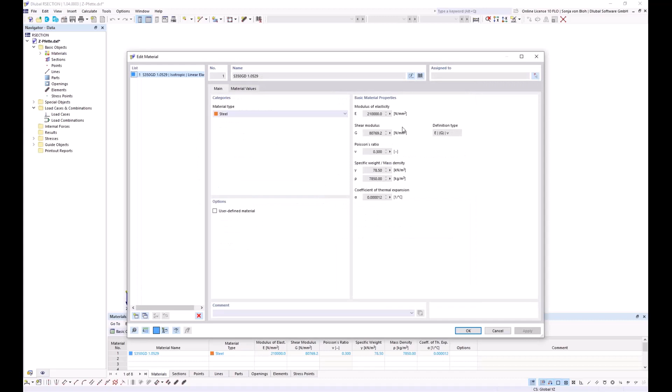Furthermore, I have to define the material here. I just want to use this material that's already shown, but if I want a different material, it would be possible to open the material library and select it from there. Okay, click here on Cancel.

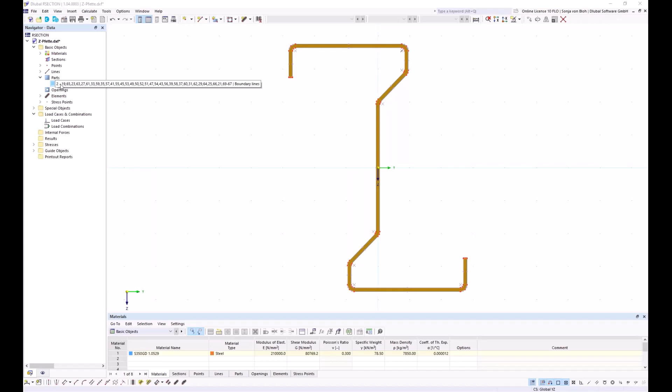Then I start the import process and click OK. With this import function, the part is created automatically, and the elements are also created automatically, as you can see here. These elements are required for the calculation using the thin-walled analysis and for the calculation of the effective cross-section.

I now go into the base data and choose the analysis method. Two analysis methods are available: the finite element analysis and the thin-walled analysis. I choose the thin-walled analysis here. As already mentioned, elements must be defined for this. This setting only affects the default setting in RSTAB; if necessary, I can change the analysis method there.

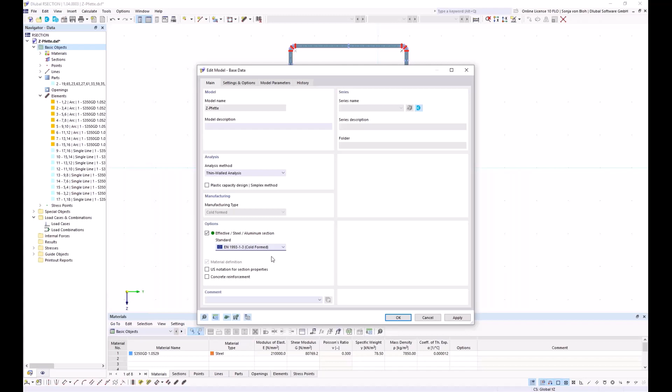Furthermore, I activate the add-on Effective Steel Section and choose the standard Eurocode 3 Part 1.3 for cold-formed cross-sections. This setting is necessary so that the steel design in RSTAB is carried out according to the standard for cold-formed cross-sections. Then I click OK.

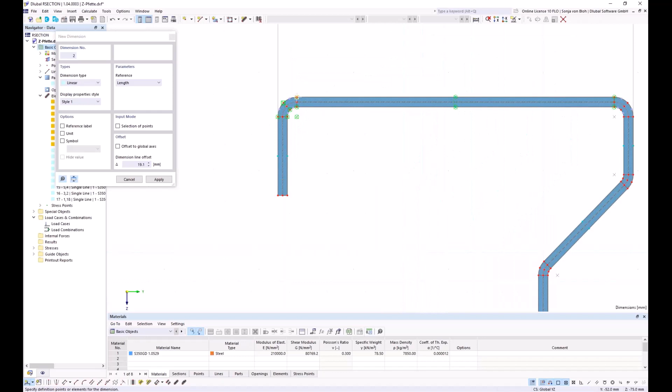It's also possible to dimension the cross-section. I will do this by creating a new dimension and choosing the corresponding points. These dimensions can also be displayed in RSTAB.

In RSECTION, I can also calculate the effective cross-section and the stresses. This is useful, for example, for a preliminary design. This has been demonstrated in previous webinars, so I won't go into it today.

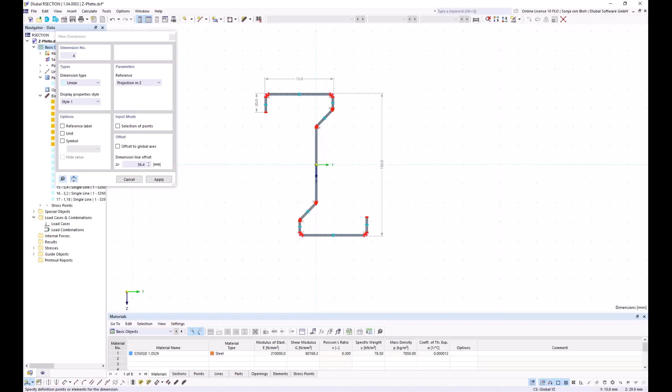However, it makes sense to start the calculation once to find any modeling errors. I go to Calculate All, and no error was shown, so it's possible to import this cross-section into RSTAB. Then I save this file, click Save, and save it in this directory, and then I can switch to RSTAB.

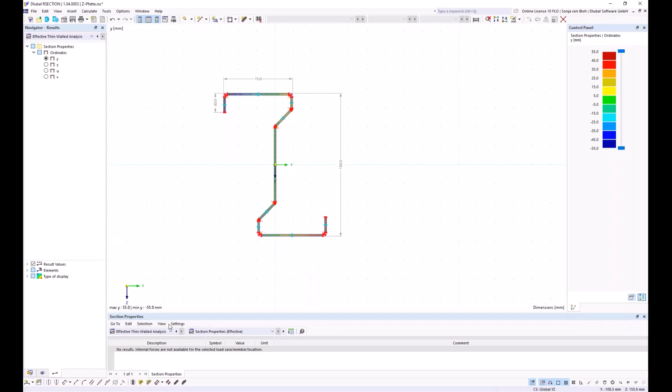I have already created the steel hall in RSTAB. The purlins consist of the cross-section just created in RSECTION. For now, I have assigned this cross-section to them, and I want to modify it.

For this, I open the Edit Section dialog, and then I open my cross-section library, and then I want to import my created cross-section in RSection.

The folder in which the RSection cross-section is stored must be integrated into the Dlubal Center. It's only possible via the Dlubal Center to import a cross-section from RSection. I want to put this folder directly under the project, so I check...

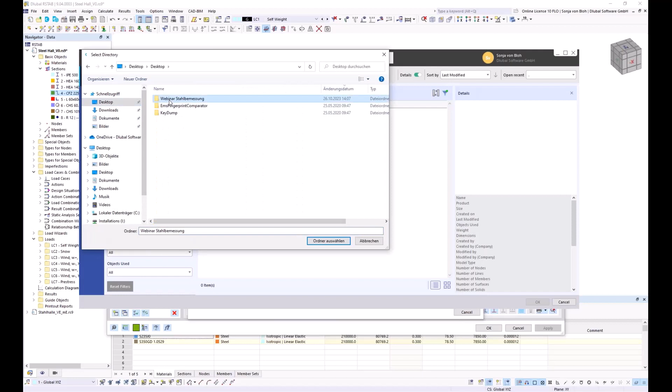I choose Add Existing Project here from the context menu, and then I choose my folder. It's here on the desktop, and then I click on OK.

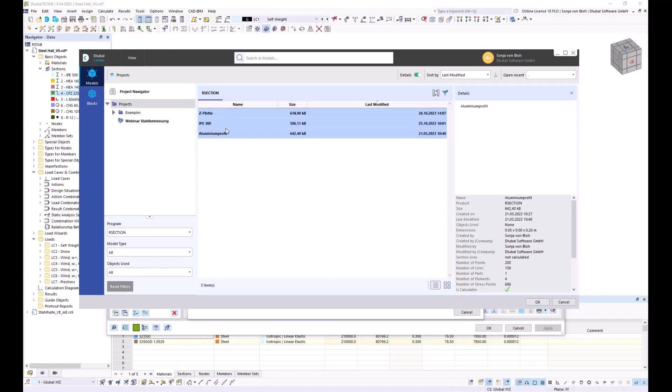The folder is now linked to the Dlubal Center, and I can select the RSection cross-section. It has recently become possible to import multiple cross-sections in one step. For this, I select these cross-sections, and then I can click on OK, and all the selected cross-sections will be imported into Rstab. Now I only want to import this cross-section, so I click on OK.

Here the checkbox thin-walled model is activated. This setting was taken from the chosen analysis method in RSection. However, I can also deactivate this option so that the calculation of the gross cross-section properties is carried out using the finite element analysis.

If this option cannot be selected, then no elements are defined in the RSection cross-section. You can see in the graphic of the cross-section that the dimensions are shown. These are the dimensions I created in RSection. And I click here on OK.

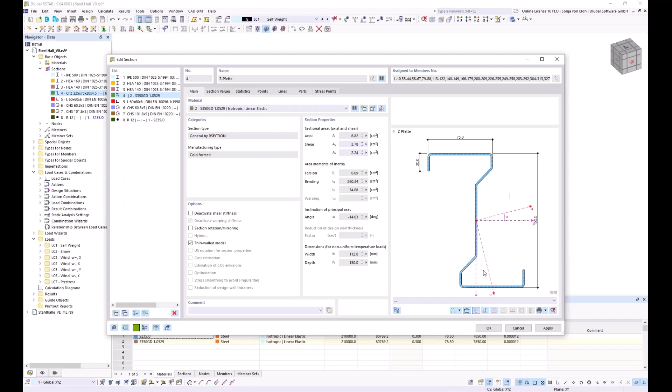For cold formed Z cross-sections, the center of shear lies outside the cross-section and the main axes are rotated. Usually the loads don't act on the shear center, which results in double bending and torsion. Usual lateral torsional buckling checks cannot be carried out.

Eurocode 3 Part 1.3 includes design methods for cold formed Z purlins, but the purlins must be within certain limits. These simplified design methods are not implemented in steel design. The lateral torsional buckling of any purlin can be carried out according to second order theory, considering warping torsion and the use of equivalent imperfections.

I would like to show this approach today, and for the calculation considering warping torsion, I first activate the add-on warping torsion in the base data. For this, I go to the base data, on top add-ons, and then I activate this checkbox here.

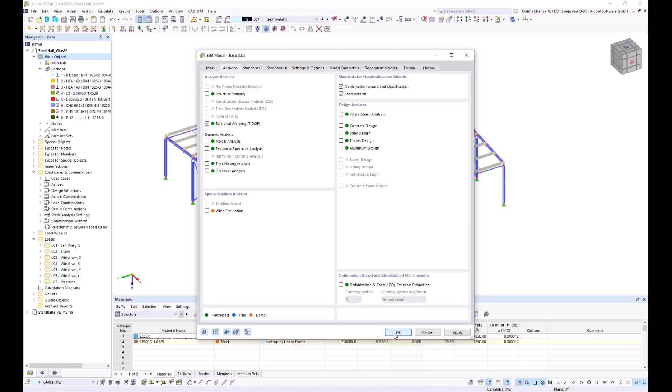Warping at the member ends is assumed to be unhindered by default. To transfer the warping between members that are connected, you can define a set of members.

The frames consist of several members. You can see it here. These members are divided, and this means that there are warping releases between each member.

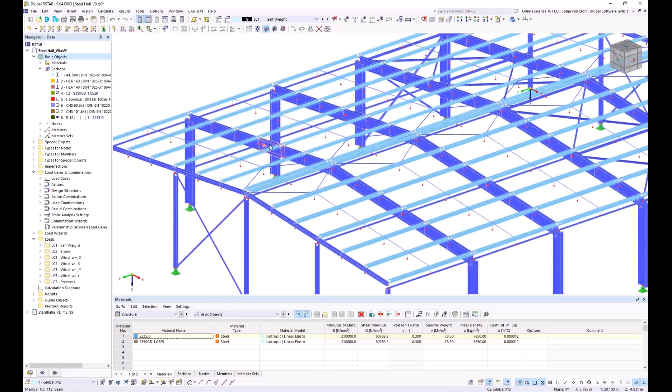The warping should be continuous for the frames, so I've already defined a set of members for them.

I show you this in the wireframe model. Here I've created the set of members for each frame, and if I open the Edit Set of Members dialog, then you can see a checkbox discontinuous torsional warping.

This option controls whether the warping should be transferred or not. This is supposed to be transferred, so I don't check this checkbox.

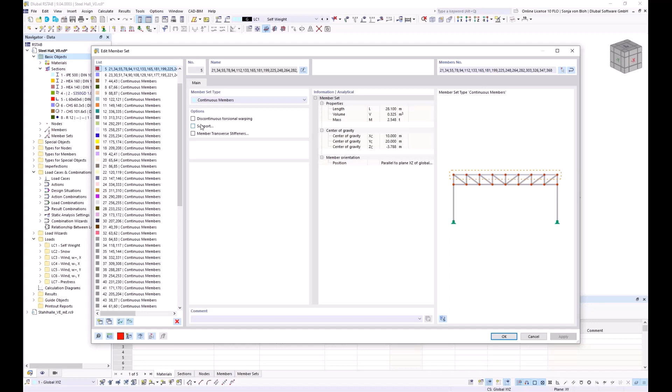Furthermore, the purlins are divided at the connection point here with the purlin suspensions, and the warping should be continuous for the purlins. So I've defined a set of members for the purlins too. You can see it here.

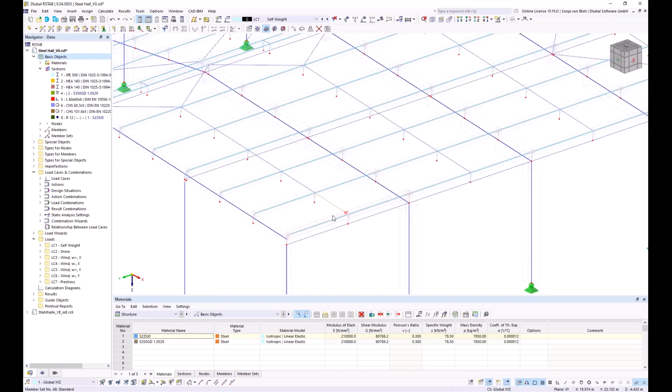When calculating with 7 degrees of freedom, the connection of members is always assumed to be at the center of gravity. If the connection is to be made at a different point, you can use member eccentricities, or you can also model the connection with rigid members.

In the steel hall, I have already defined member eccentricities for the transoms, the purlins, and the purlin suspensions. To do this, it's necessary to activate the checkbox eccentricity in the member dialog. I have done this here for the suspension.

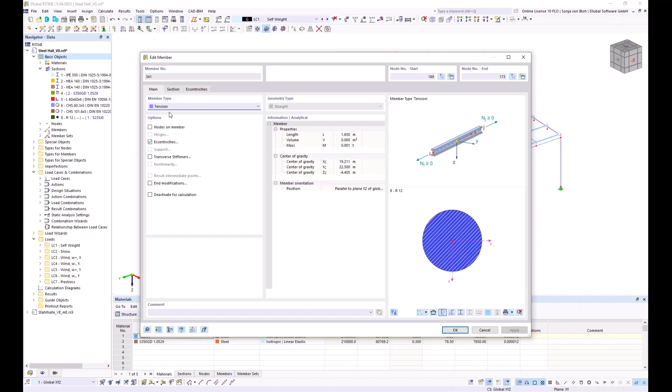Here I've activated this checkbox eccentricities, and here in the tab eccentricity, it's possible to assign a member eccentricity to this member. And I want to also look into this definition of the member eccentricity.

You don't have to calculate the eccentricities manually, you can also define them relative to another cross-section. I have used this option here. I have defined the eccentricity type relative to sections, and I have defined a transverse offset from the section of another member, so that the eccentricity is calculated automatically by the program.

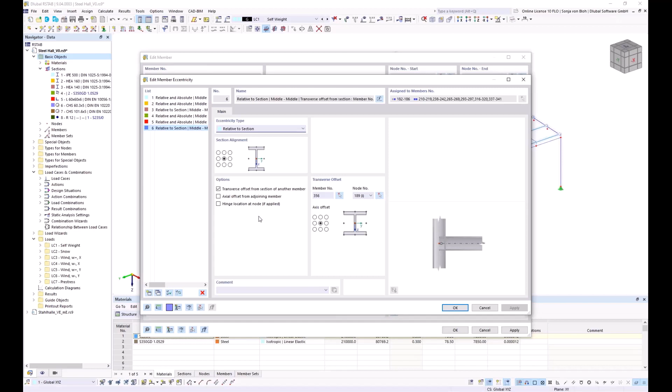The steel hall is covered with trapezoidal sheeting. I would like to use the trapezoidal sheeting as lateral and torsional support. I can take this stabilizing effect into account in Rstab using shear panels and rotational restraints.

I first define the shear panel. I can do this via the navigator data, here under types for members, I see member shear panels. I create a new one, and there are different types of shear panels to choose from. We have trapezoidal sheeting, bracing, or trapezoidal sheeting and bracing. I want to define a trapezoidal sheeting, so I choose this type.

Then I go to the tab trapezoidal sheeting, and I choose the trapezoidal sheeting from the library. I go here and define this trapezoidal sheeting. It's a Hoesch T50.1 - 0.75. I click on OK.

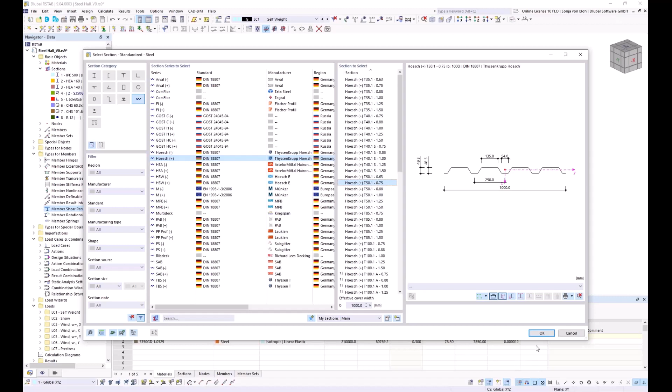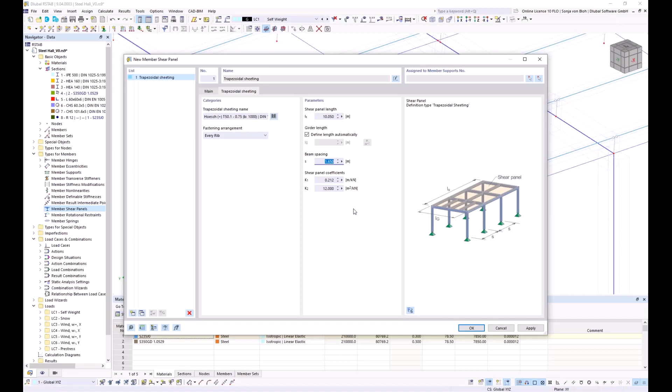The trapezoidal sheeting is fastened in every rib, so I choose this option here. The shear panel length corresponds to my roof length, and I can pick this graphically. I choose measure, then choose my nodes, and now the shear panel length is defined as 10.05 meters. Then I have to define the beam spacing, which I will also do graphically. I measure this - it's the spacing between the purlins - and then click OK.

Next, I define the rotational restraint. I find this also in navigator data here. I create a new member rotational restraint. There are different rotational restraint types, continuous or discrete. For the trapezoidal sheeting, the restraint type is continuous. Then I go to the tab continuous.

The trapezoidal sheeting and the material can then be selected from the database. The purlin spacing and the continuous beam effect still need to be selected. The spring stiffness C100 must be determined depending on the load.

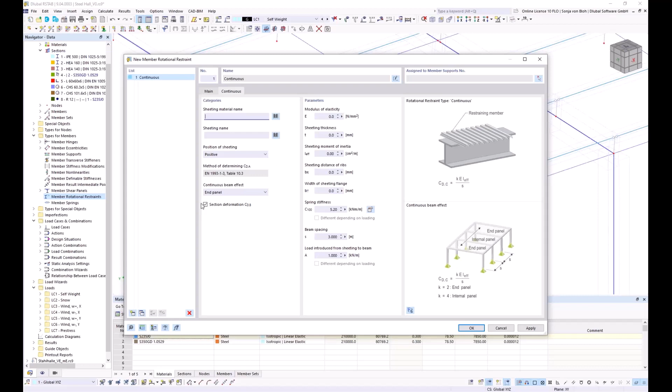Unfortunately, the effect of cross-section deformation on rotational restraint can only be calculated for I cross-sections, not for Z section cross-sections. The calculated spring stiffness would therefore be on the unsafe side, so I have determined spring stiffness manually according to the formulas described in Eurocode 3 part 1.3. I want to consider this spring stiffness, so I go back to the tab main.

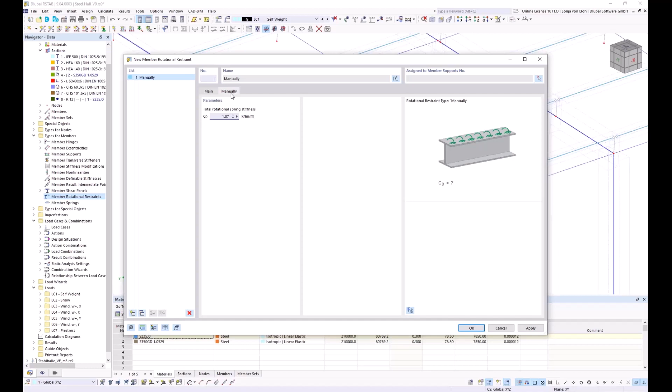I choose the type manually, and then define the rotational spring stiffness. I've calculated it to 1.07 kilonewton meter per meter. I click here. I now have to assign the shear panel and the rotational restraint to member supports.

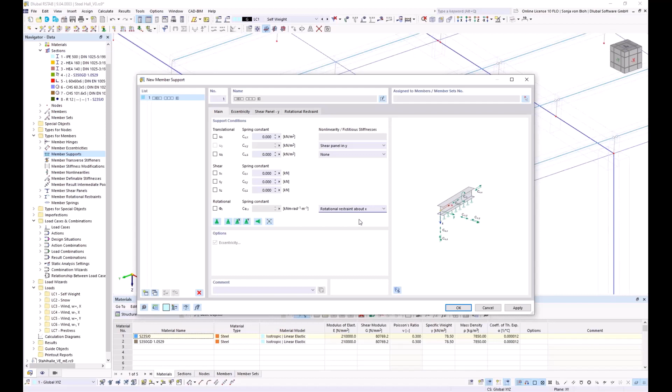I'm creating a new member support, also via the navigator data. Here I create a new member support, and then I choose my shear panel in Y and my rotational restraint about X. The trapezoidal sheeting lies on top of the purlin, so I define an eccentricity, with the reference on the top here.

Then I go to the tab shear panel in Y. Here I choose the shear panel type I've just created, and I will do this also for the rotational restraint, choosing the manually defined rotational restraint.

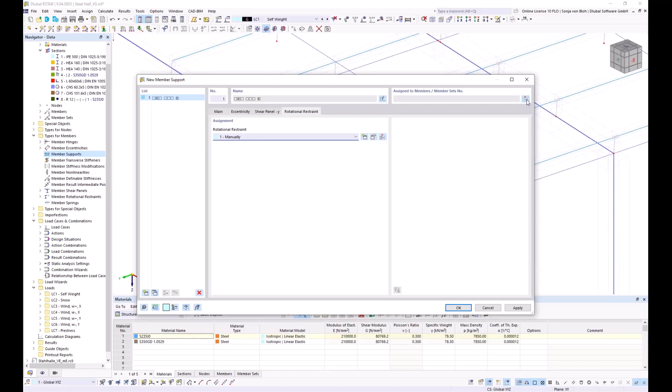I now assign the member support to the corresponding members. To do this, I click on Pick Members, and I use visibility for it - here a generated visibility. I choose the cross-section of my purlin, then activate the visibility, and choose my members. Then click OK and OK, and the trapezoidal sheeting and shear panel are assigned to these members.

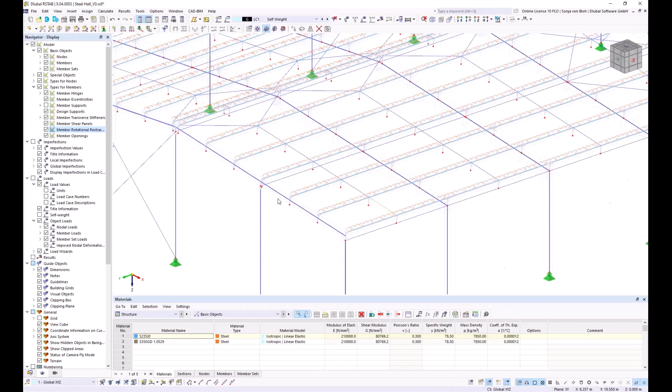It's also possible to display the rotational restraint and shear panel graphically. To do this, I go to the navigator display, and find the checkboxes here under types for members. I activate member shear panels and member rotational restraint. I will see it if I cancel the visibility mode - now you can see the shear panel and rotational restraint graphically. I can uncheck these checkboxes again, I don't need it now.

By default, rotational restraint and shear panel are not taken into account in the static, stability, and modal analysis. I can also take these into account by using a structure modification. I want to create this structure modification - I find it in navigator data under special objects, where I define a new structure modification.

The consideration of shear panels and rotational restraints is already activated here via this checkbox. Then I modify the name of this structure modification - I name it Consider Shear Panel and Rotational Restraint.

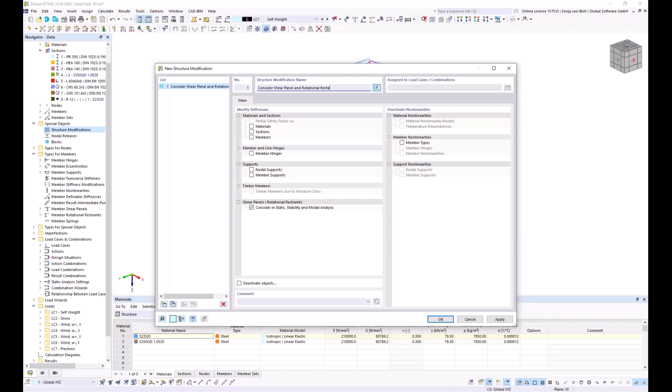And then I click on OK. I then have to assign this structure modification to the relevant load cases or load combinations in which it should be taken into account. For this, I use the combination wizard, which I find in navigator data. Here I open this wizard, and I only have to check the checkbox 'consider structure modification' and choose the corresponding structure modification.

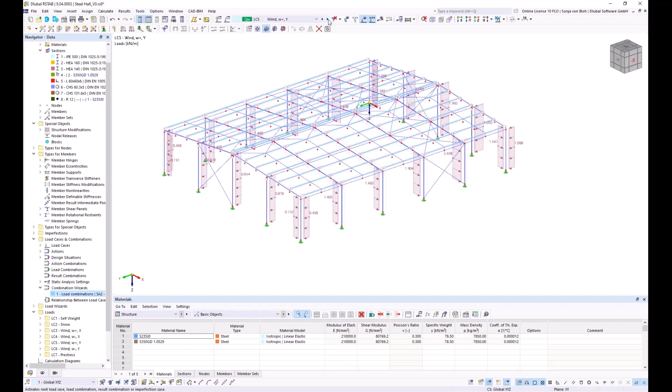And then I click on OK. I've already defined dead load, snow load, wind in X direction and Y direction. I will show you this by activating the view here. I have the load case self weight, then snow, and also wind in X direction and Y direction, and also a pre-stress on the bracings.

I want to go back to my loads that I've applied on the purlins. If a member load without eccentricity is defined, the load always acts at the center of gravity in the calculation with 7 degrees of freedom.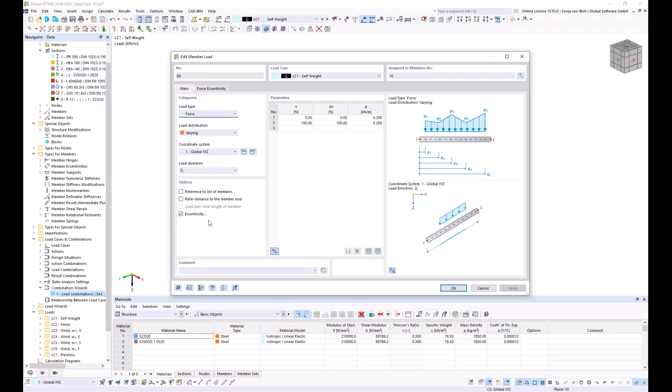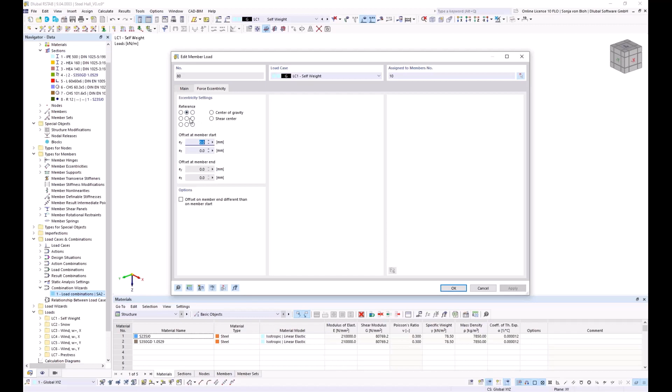I will go into this load, and here I have the possibility to define an eccentricity. If the load acts on another position, it's possible via an eccentricity to change this. I've activated the eccentricity checkbox, and in the force eccentricity, it's possible to define the eccentricity for the loads. The load should act on the top of the cross section, so I've defined the reference on the top. Click here, okay.

I've already created global imperfections. I will show you this now. I've created global imperfection in plus X direction and also in plus Y direction. And I now have to define the initial bow imperfection for the purlins.

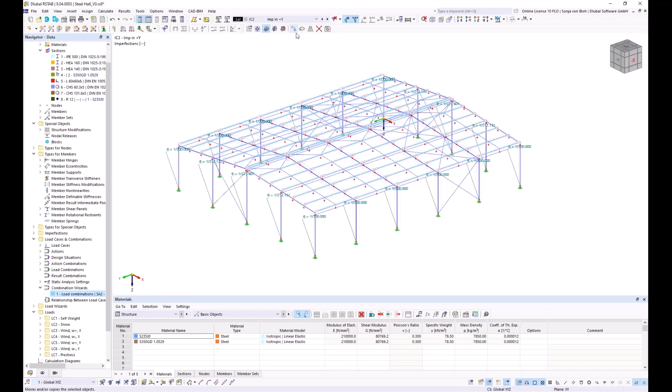The various options for defining imperfections have already been demonstrated in previous webinars. Today, I would like to show the definition of local member imperfections. The purlin is supported in Y direction by the purlin suspension, so a two-wave imperfection shape would be possible. If the suspension is not stiff enough, it would also be possible to have a single wave imperfection shape. For the imperfections, I could now create two imperfection cases. However, it's also possible to use a stability analysis to obtain information about the imperfection to be applied and thus reduce the number of imperfection cases.

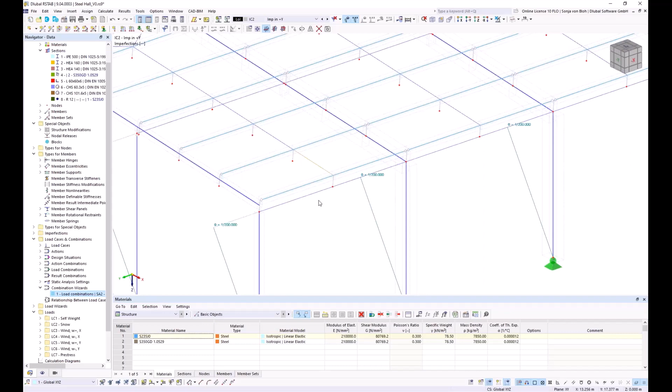I would like to show this now. I go to my navigator data, then to base data, and here I activate the checkbox structure stability. Then I click OK. I first look at the stability analysis settings by opening this here. I assume that local mode shapes for the purlins only appear at higher eigenvalues. Therefore, I increase the number of eigenvalues to be calculated to 25.

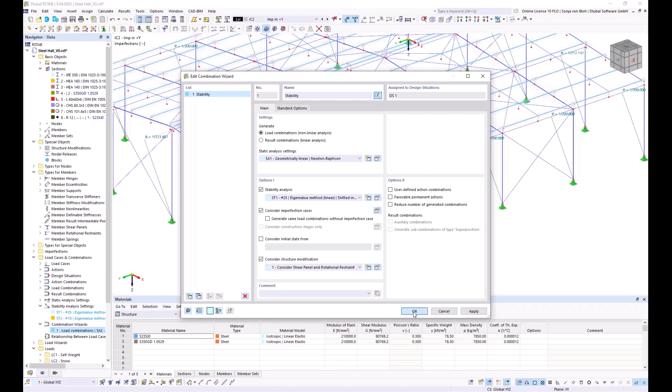In the combination wizard, I activate the stability analysis with the calculation of 25 eigenvalues, and I also change my static analysis settings to first order theory. Then I name this wizard stability. I open the design situations, and here the combination wizard stability is already chosen, and now the load combinations are generated considering the global imperfection, my structure modification, and my structure stability add-on.

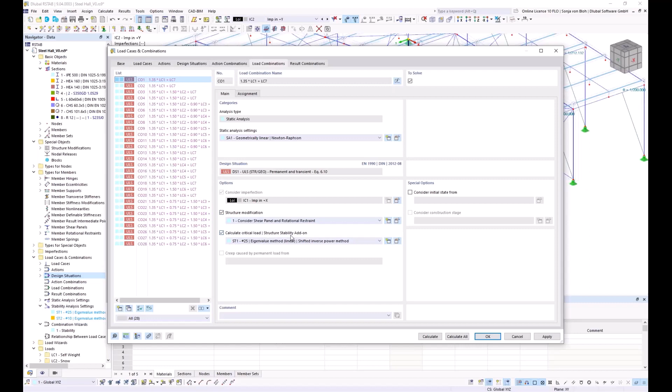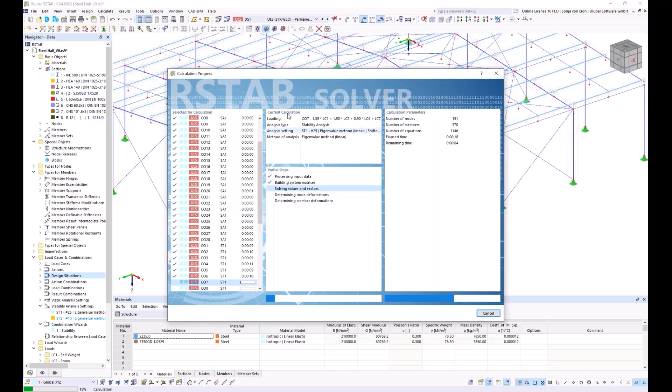I now run the calculation for my design situation 1. A message informs me that the cross sections or topology of the members in the member set are not compatible, and the warping may not be able to be transferred. The reason is, among other things, that the set of members of the frame is not straight—you can see it here. The column is angled to the other frame, and this is the reason for this warning message. I assume that the warping can be transferred through the connection, so I ignore this warning message, and the warping is then transferred.

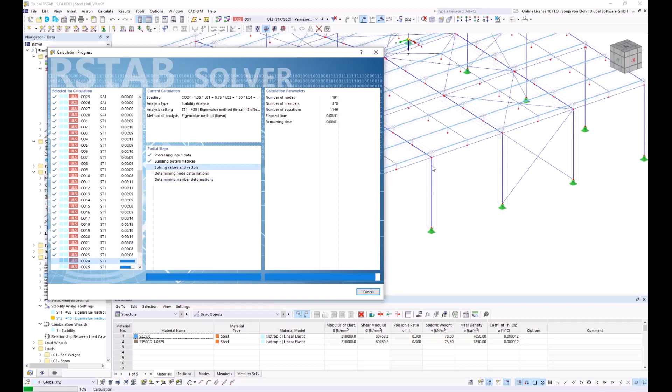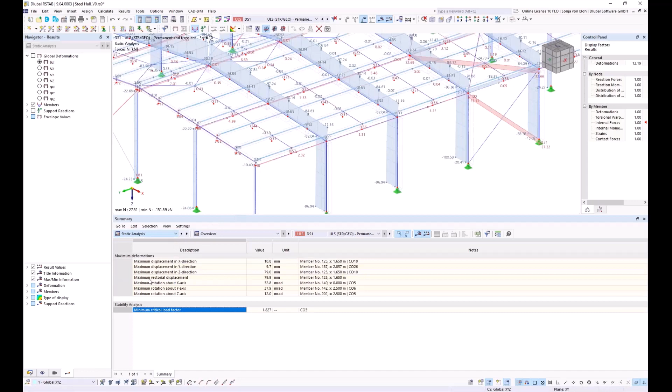Here on the overview, I can see that the minimum critical load factor is calculated in load combination 3. I will go to the stability analysis and open load combination 3. I deactivate here the display of the loads.

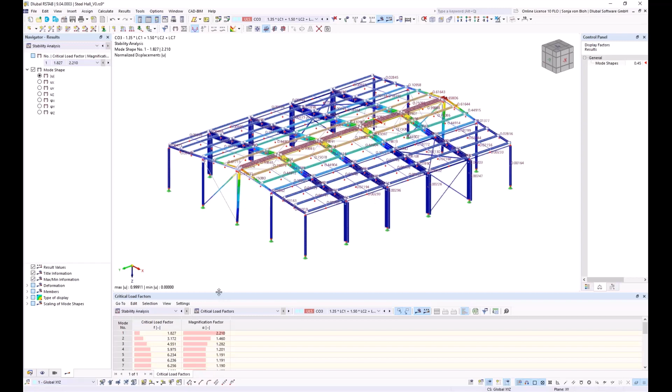As a part of the stability analysis evaluation by mode shape, the mode relevance factor can be used to quickly differentiate between local and global mode shapes. A mode relevance factor of 100% means that a single member has maximum relevance for the considered mode shape. To look into the mode relevance factor, I open a different table: results by member, effective lengths and critical loads by member, and you can see this mode relevance factor for all members.

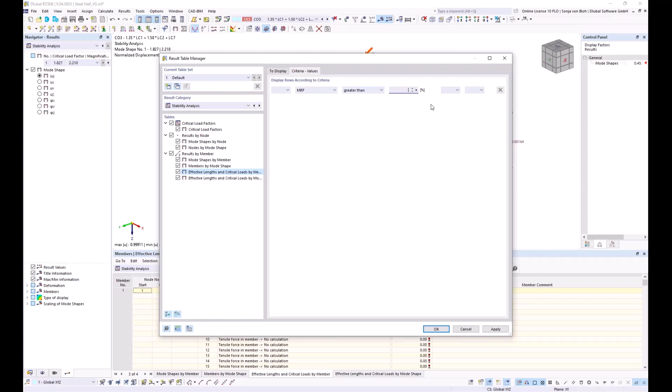I can also use the filter option to output only mode relevance factors that are greater than a certain value. I will do this now. I open the result table manager and activate the checkbox according to criteria. Here I can choose the mode relevance factor, and I want to see only mode relevance factors greater than 70%. And I click here on OK.

And then I want to see my member number 258, and this member has a mode relevance factor of 100%, and this means that it is a local eigenvalue.

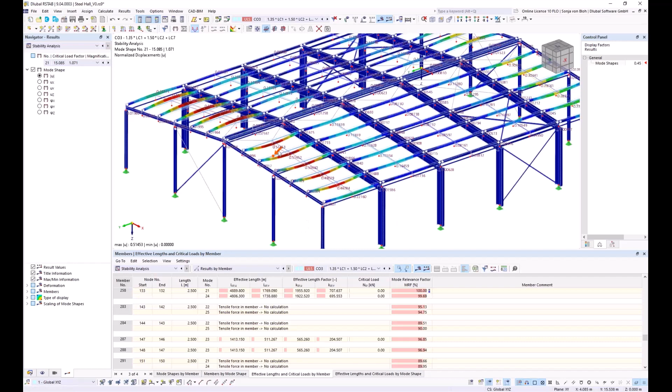And I can see for this also the mode shape, and this is a single wave here for the purlins. So I have only to define a single wave shape for the bow imperfection. I will do this now.

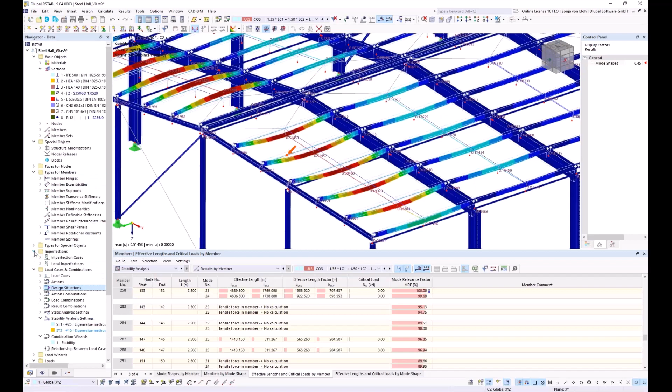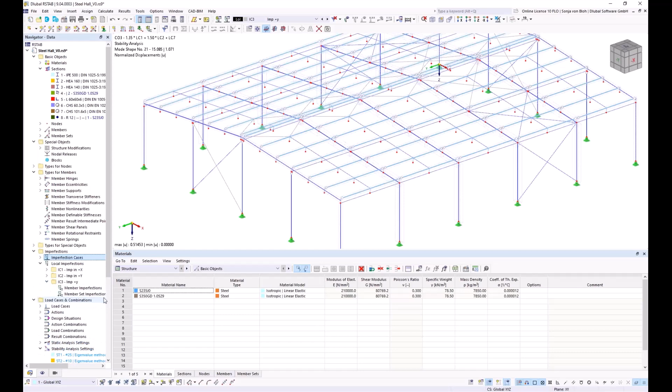For this, I create a new imperfection load case. I open the navigator data again, and then I create here a new imperfection case. I name it imperfection in plus Y direction, and I choose here the imperfection type local imperfections.

I now have to define the local imperfections, and I define a new member set imperfections. Here I choose the imperfection type initial bow, and as definition type, I choose manually relative. For the Z cross-section, I use according to table 6.3 of Eurocode 3 part 1.3, the buckling curve B, so that I define an initial bow of 1 divided by 250.

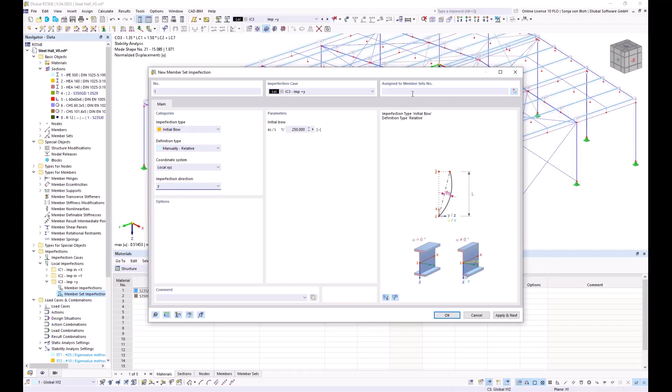And I want to assign this initial bow to the imperfection direction Y. Now I have to choose the member sets, and I activate here my visibility once again. I choose then the member sets, and I click on OK.

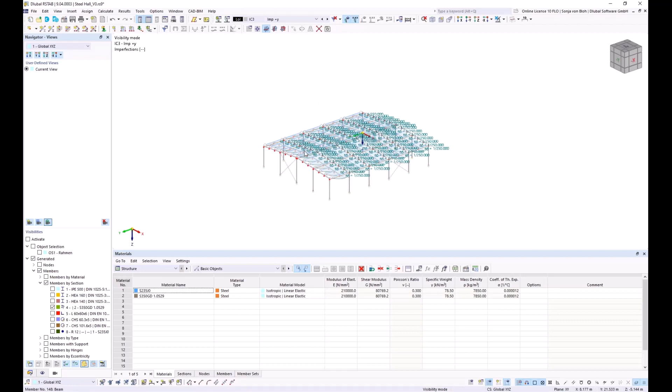I can show this also graphically if I activate the Show Imperfection button, and I now have to define the imperfection also in the opposite direction. I will do this by copying the imperfection case, imperfection in plus Y.

To do this, I go to the navigator data again, and I open here my imperfection case. I choose it, and then I click on button copy selected imperfection case. I rename this case, and then I click on OK. And all I have to do is now to change the imperfection direction to minus Y.

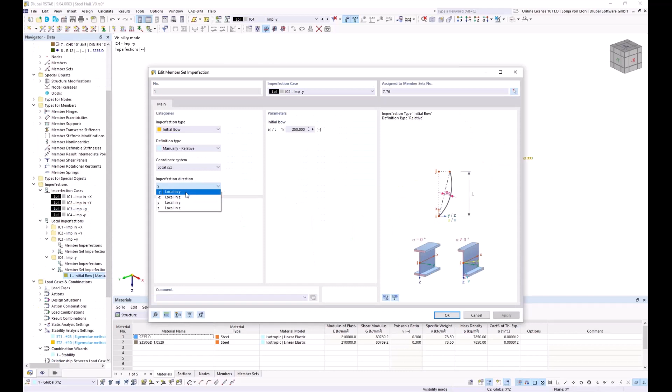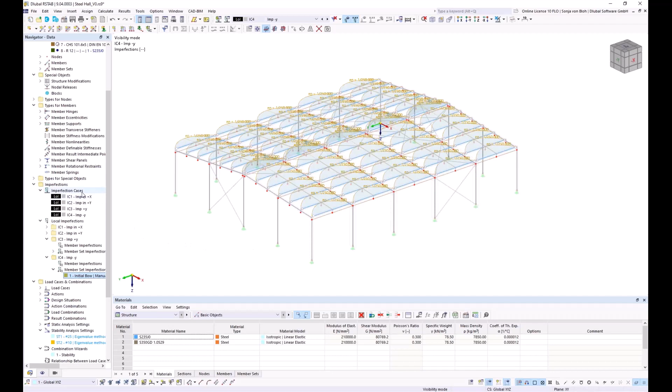I would now like to combine the imperfections with each other. For the combination of imperfections, I create a group of imperfection cases, and I will do this here in the Edit Imperfection Case window. Here I create a new imperfection case from imperfection type group of imperfection cases, and I want to combine first my imperfection in global X direction with my imperfection in plus Y direction.

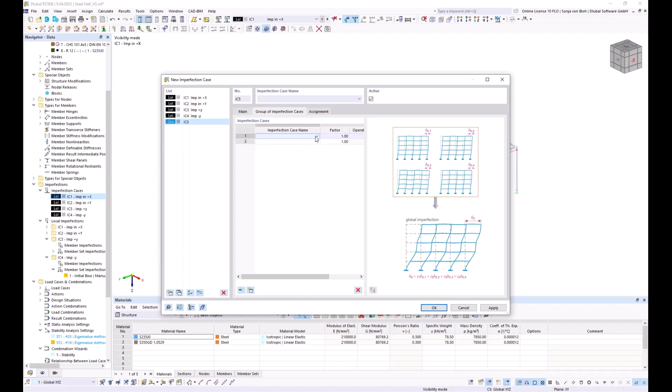For this, I go to the tab group of imperfection cases, and then I create a new line, and here I choose imperfection in plus X with the operator and imperfection in plus Y, and I name it imp plus X plus Y. The other imperfections I create by copying.

So I select this group of imperfection, and then I click here on copy selected imperfection cases, and here I change the parameters to minus Y, and I need this also for the global direction Y. So I copy this, and all I have to do is to change here the name and the imperfection.

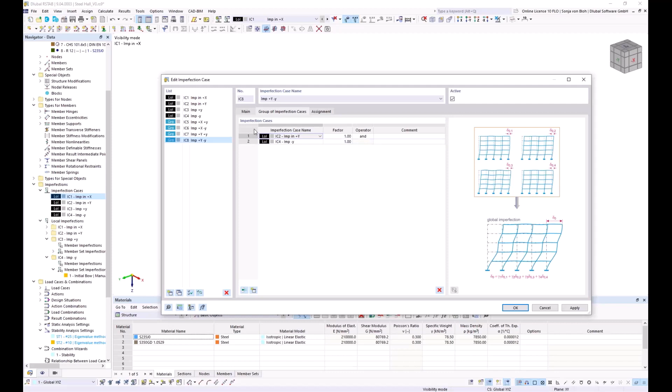So that the individual imperfections are not taken into account in the combinatorics, I deactivate for them the checkbox active. And then I click here on OK.

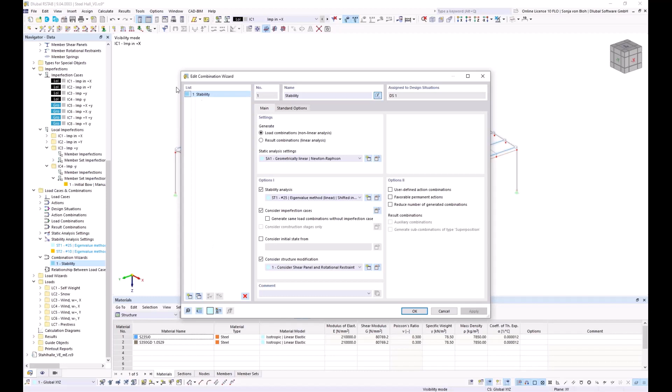Then I have to modify my combination wizard, or create a new combination wizard for my design situation. For this, I open the combination wizard dialog and I copy the stability wizard and I name it here design. And I want to do my design according to the second order theory, so I choose here second order.

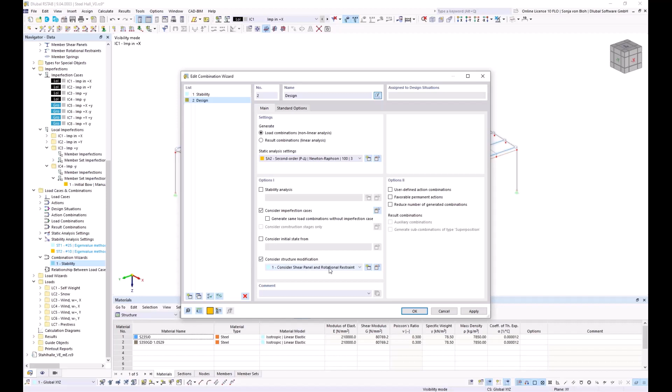I don't want to use the stability analysis anymore, and I want to consider my imperfection cases and my structure modification. Then I click on OK.

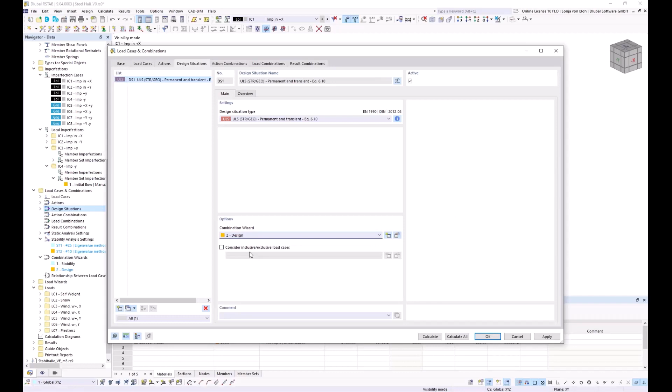I now have to assign this combination wizard to my design situation. For this, I add my design situation, and here I choose now the combination wizard for the design. If I go here, then I can see the results from my load combination. Here the imperfections are considered and also the structure modification.

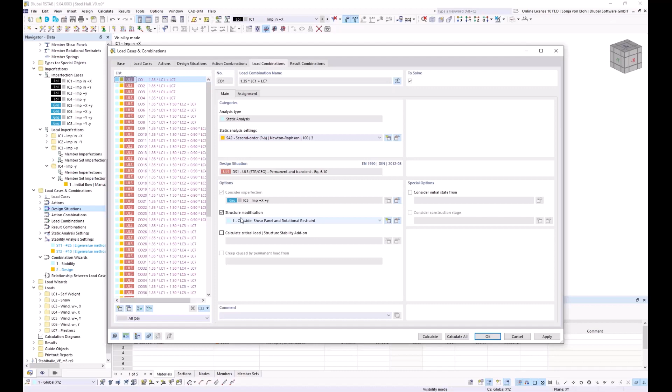The structure is complete so that I can make the settings for the steel design. For this, I first activate the steel design add-on in the base data. Here on tab add-ons, I activate here the steel design, and on the tab standards, I select the standard that I want to use. I select here the Eurocode 3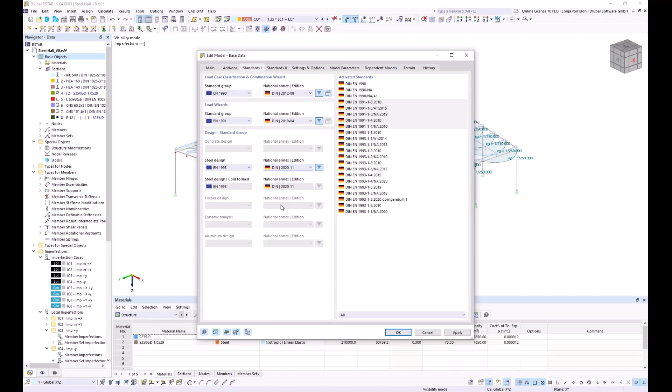and I select the German national annex, and click then on OK.

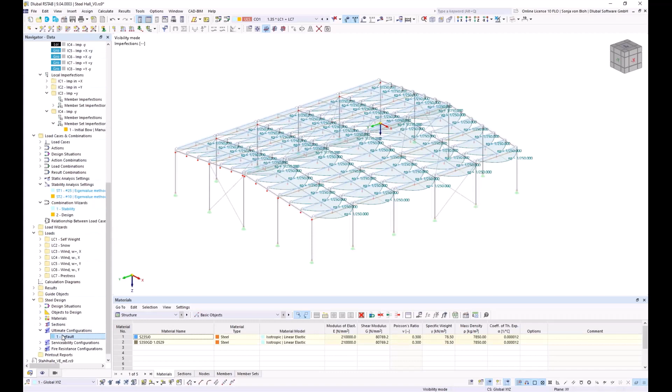I now want to look into the ultimate configuration for the steel design. I find it here also in Navigator Data, Ultimate Configuration. And here I deactivate the checkbox Perform Stability Analysis, since all stability effects are already included in the calculation. Therefore, only cross-section checks have to be carried out, but with the partial safety factor gamma M1 for stability designs.

For this, I have to activate this checkbox. Here in chapter Design of Cold Form Sections, the steel design derives from the manufacturing type, whether the design must be carried out according to Eurocode 3 Part 1.1 or Eurocode 3 Part 1.3 for cold formed cross sections.

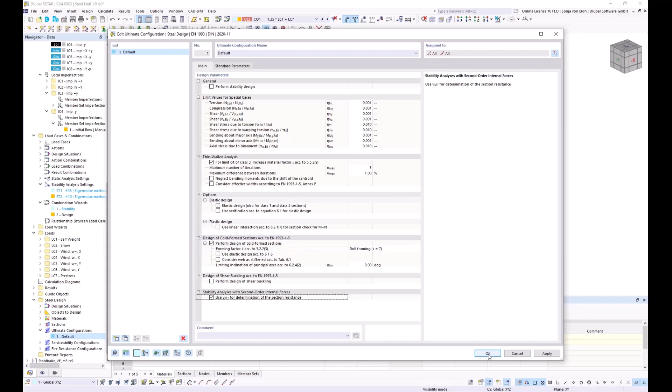If I deactivate here this checkbox perform designs of cold form sections, then the design would be carried out according to Eurocode 3 Part 1.1. Then I click here on OK.

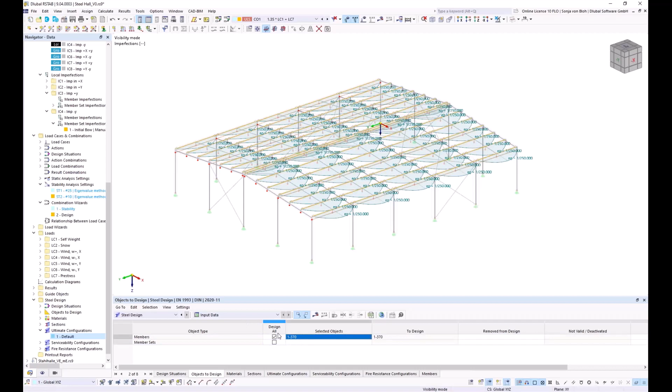In the table steel design and add-on steel design, in tab Objects to Design, I choose the members that I want to design. I want to design all purlins. I deactivate this checkbox for member sets, and then I choose the purlins. I activate the visibility first, then select all my purlins, and click OK.

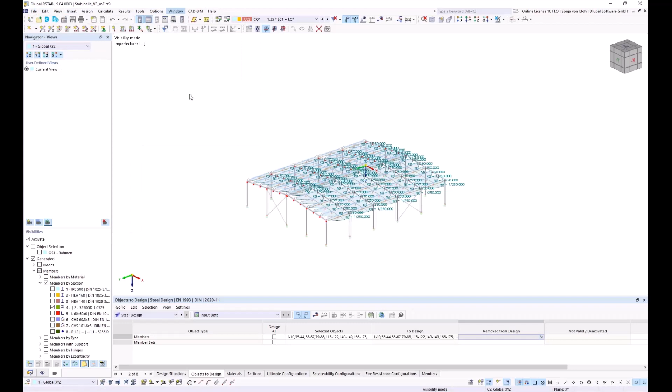The calculation takes time because the effective cross-section is calculated in an iterative process. I therefore show you the results in a calculated model. Here I go to the design ratios on members. In the table, the numerical results of the design are shown. To display the details, I double click on the corresponding table row.

Separate effective cross sections are calculated for axial force, major axis bending, and minor axis bending. According to the information from the Standards Committee of Germany, the effective cross-section can also be calculated for the combination of internal forces in a design with 7 degrees of freedom using imperfections. We will implement this in future.

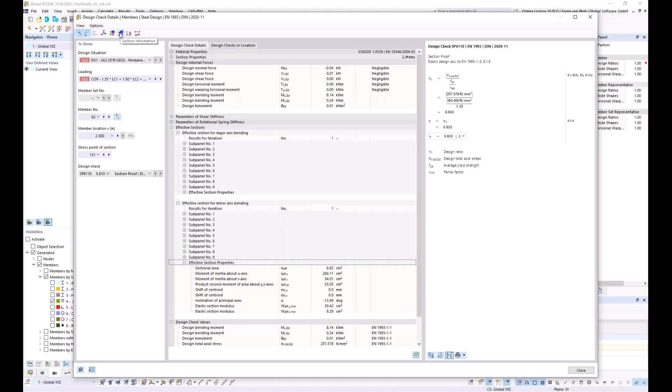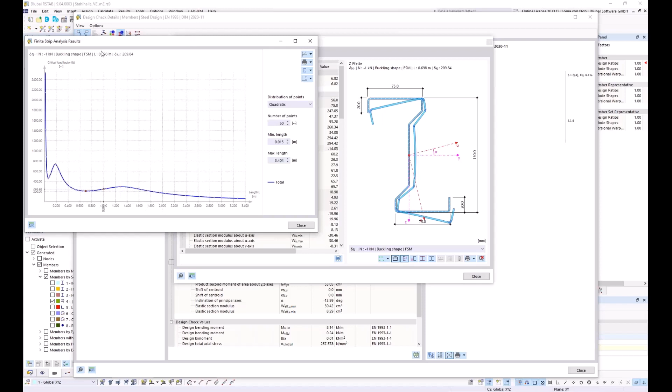The effect of distortional buckling is determined using the eigenvalue method. You can display the mode shape via this button here, section information. Here we have the buckling shape for only axial force, for major axis bending, and for minor axis bending. I will show you the buckling shape for only axial force, and by default the mode shape for distortional buckling with the associated critical load factor, which you can see here, is displayed first.

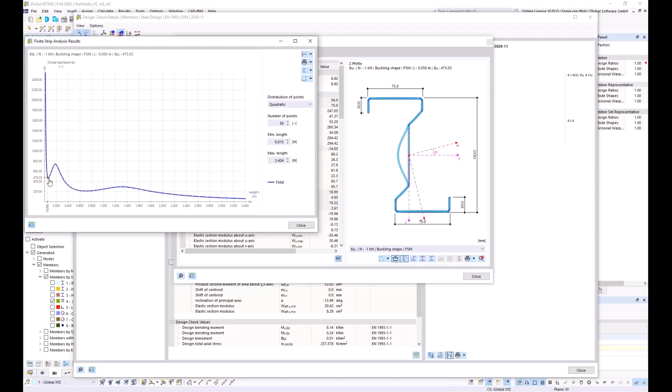By clicking here on the point on the graphics, further forms of instability can be displayed. Here you see the instability form for local buckling.

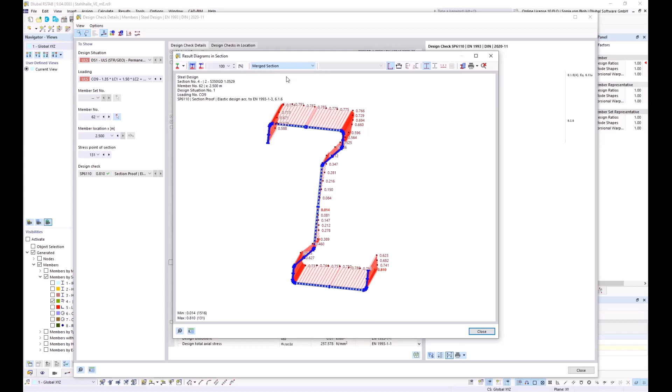The stresses can also be displayed graphically. To do this, I open the result diagrams in section, and it's possible to display stresses on the gross cross section, and also on the effective section. If I want to see the effective section due to major axis bending, I choose this setting, and I can now see this element is reduced due to local buckling, and here the lip is reduced due to distortional buckling.

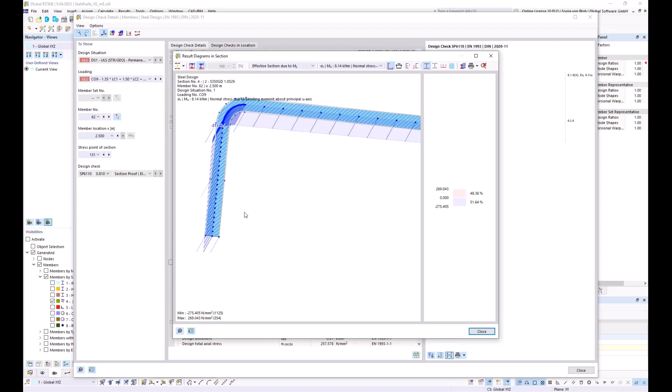The elastic design according to chapter 6.1.6 is carried out. The utilization is below 1 for all purlins, so the cross-section and stability checks are fulfilled. That brings me to the end of the webinar. I hope it helps you in designing cold-formed cross-sections and steel design. I now give the floor back to Andreas.

Okay, thank you, Sonja, for this nice presentation. We got some questions. One question was if it is possible to exclude the restraint for certain load combinations, for example when we have very high wind suction. Yeah, that's of course possible. We can use different structure modifications for the different load combinations. In our example it was not necessary because we have a higher self weight minimum, it's the same as the wind suction example, but that would be possible.